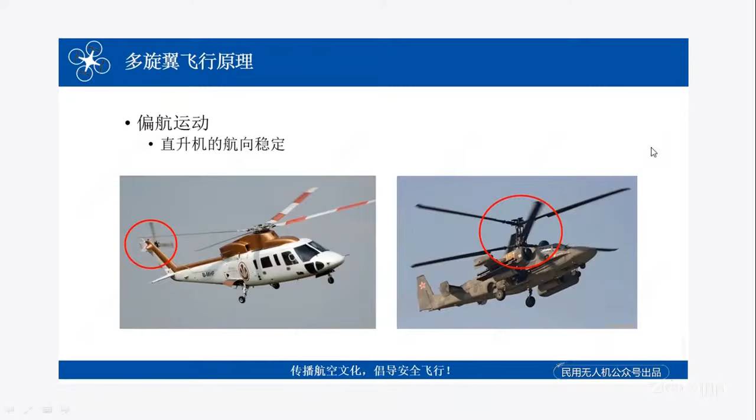So let's now talk about the debugging and assembly. I will leave you now with this video to learn how to assemble and debug the first part of the drone. Hopefully you can listen to the voice or just try to see what you can watch on the screen.

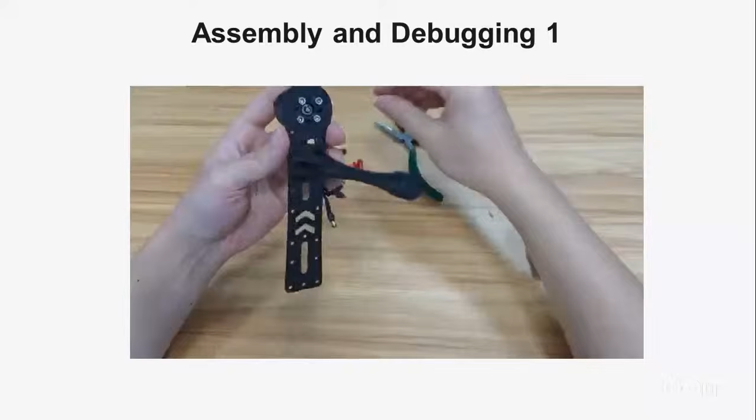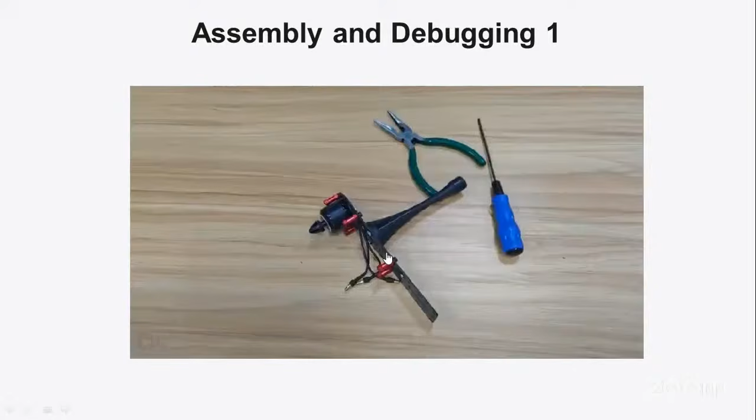Okay, this is the first step of the assembly: the motor installation. We are trying now to secure the motor to the carbon fiber lower arm using a screw. If you want to try again, it only takes a few seconds. So the first part is the motor installation.

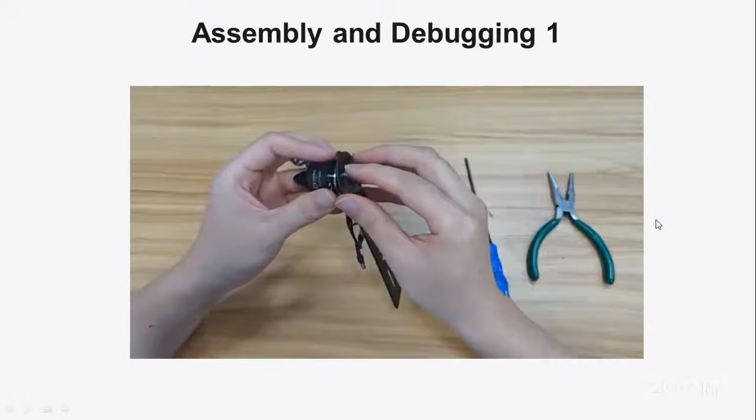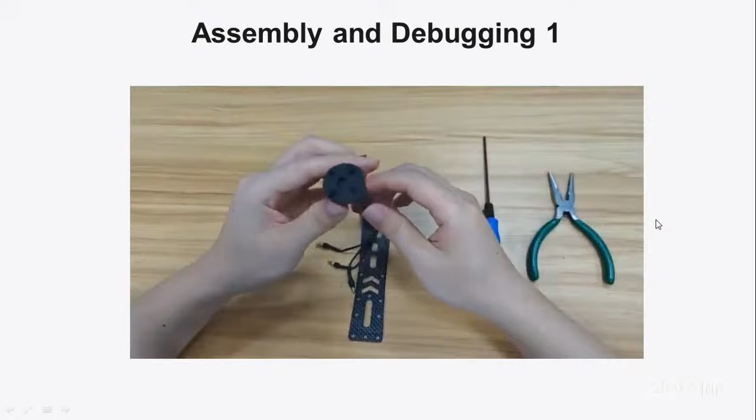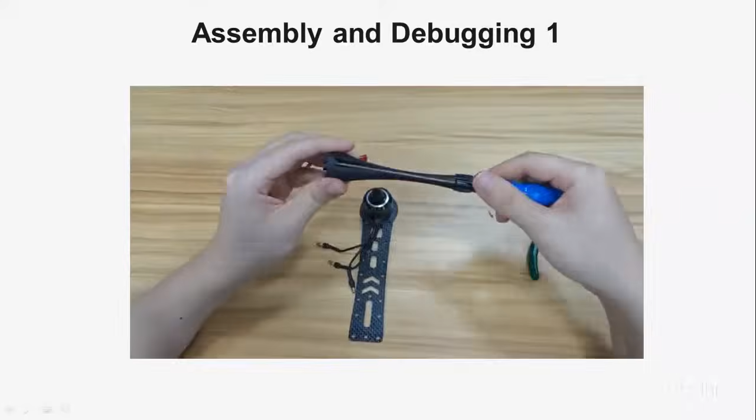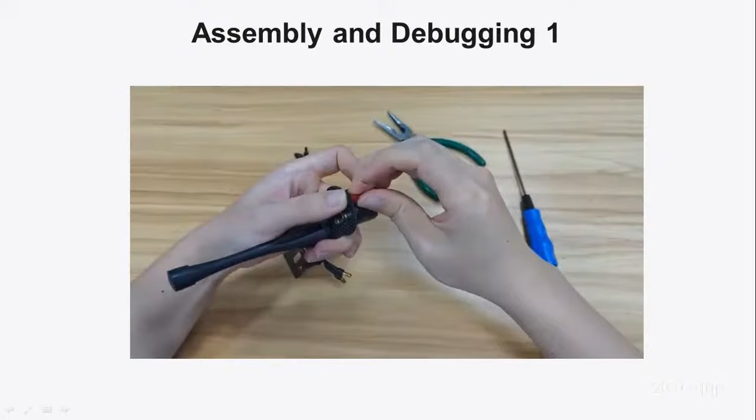And landing gear attachment, and the post assembly, the aluminum part. Of course, this is a laboratory module, so it can also teach students how to do the assembly and the debugging process.

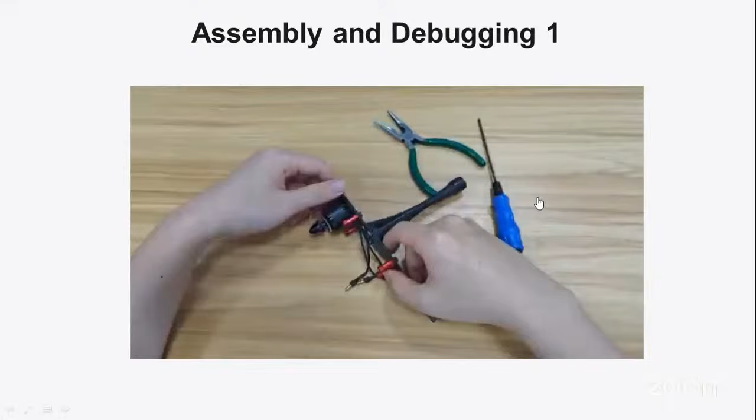Okay, so let's now move to the central power assembly, and there is also a short video showing the central power assembly process.

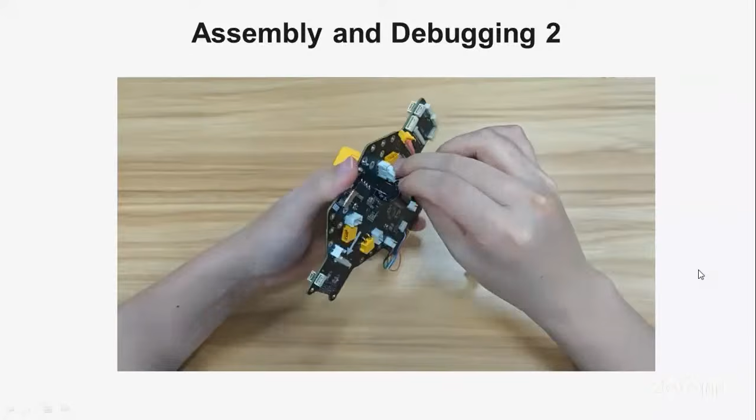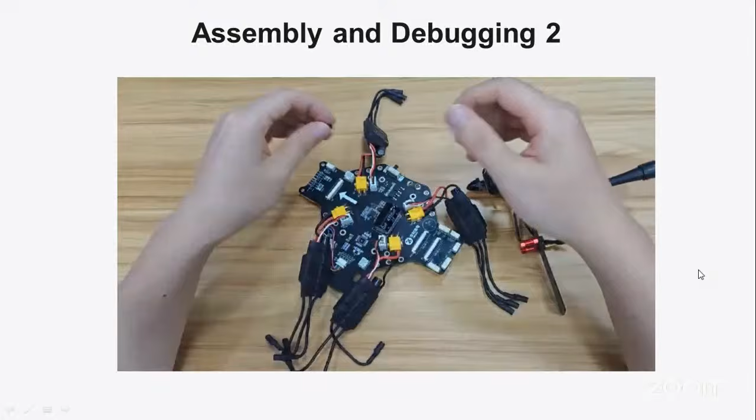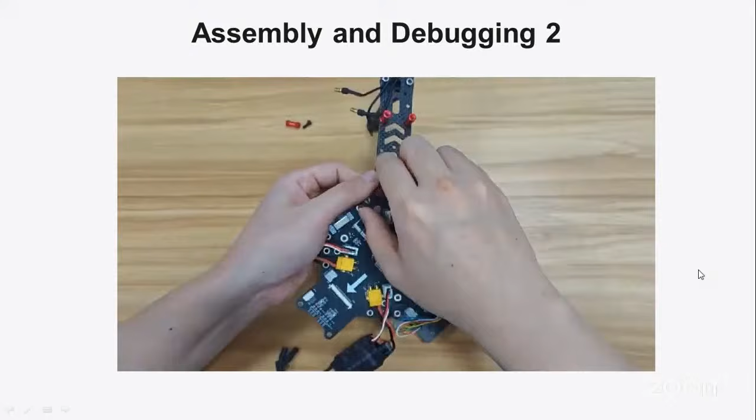For more knowledge, we have the electronic speed controller installation, we call it ESC, acting as the bridge between the circuit board and the motor. As you know, drones usually need AC to control speed, but we depend on the battery, which is DC. So we have a controller to modify or adjust the battery's DC power until it has the AC frequency needed to control the motor speed, based on the flight controller signals.

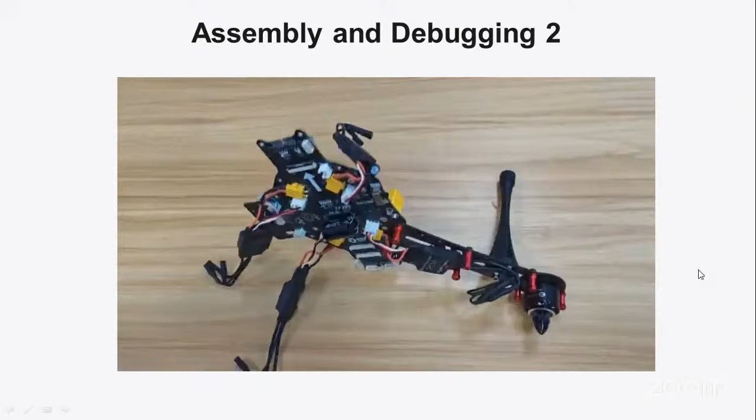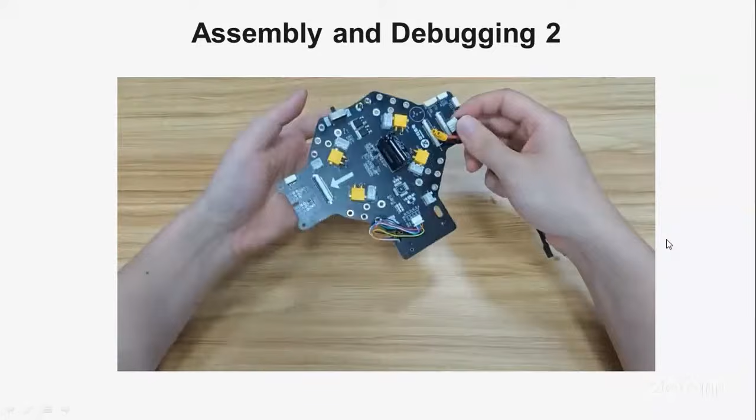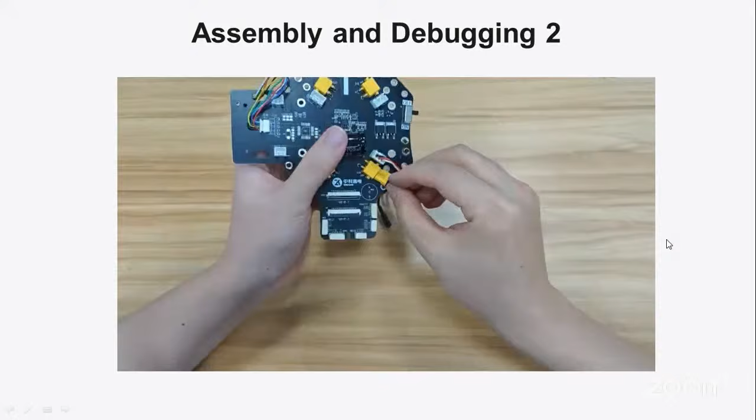I will also let you watch this video, it's only a few seconds. So first, after the motor installation and landing gear attachment, we are now installing the electronic speed controller and the frame assembly to secure the circuit board to the bottom, and also place the carbon fiber arm plates. This is assembly number 2.

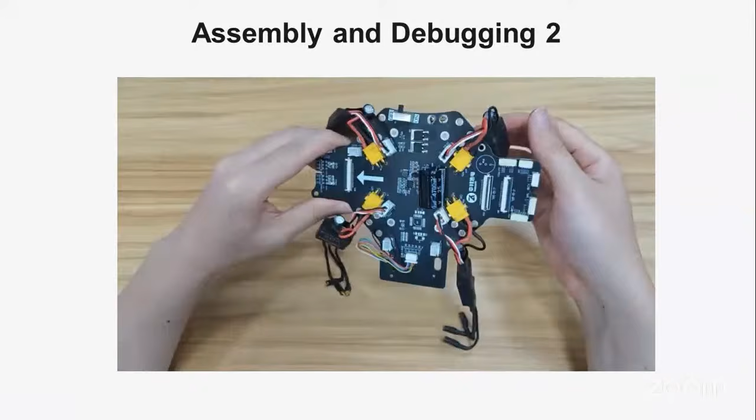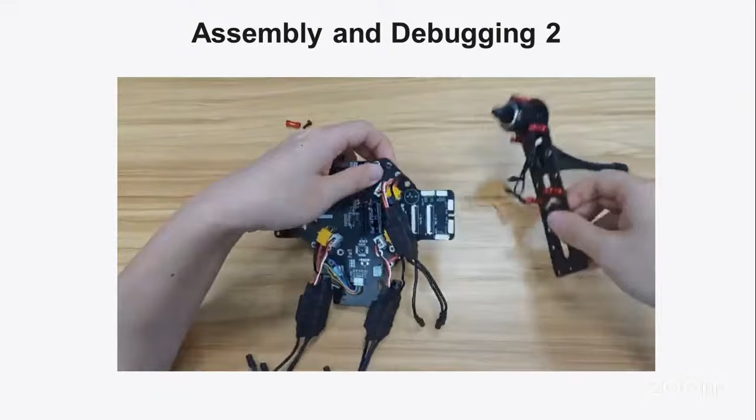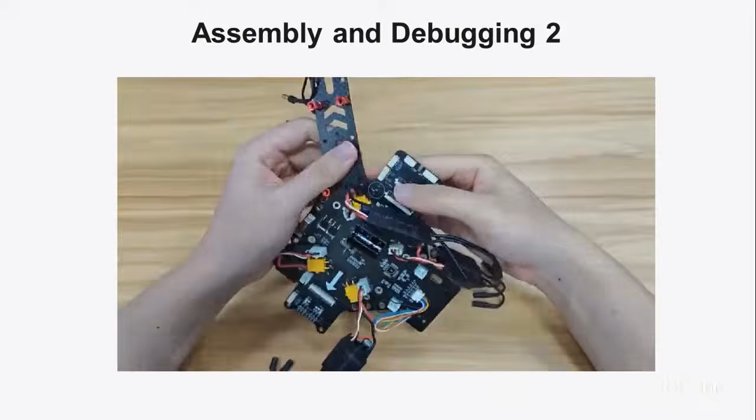As I mentioned, this is only a laboratory scale drone for the students, and also securing the wires here using a strap to firmly fix the controller into the lower arm.

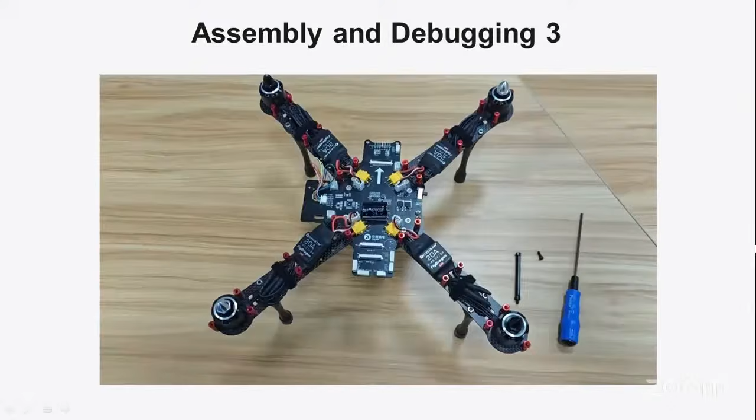Here is also another video showing how to install the battery section. So we have now fixed the four arms and are going now to install the battery part.

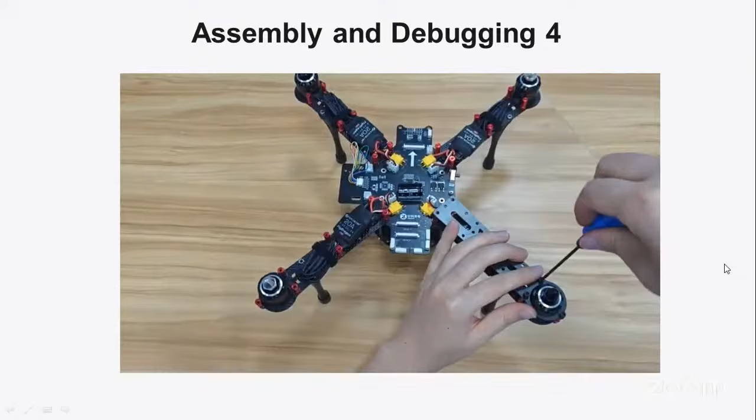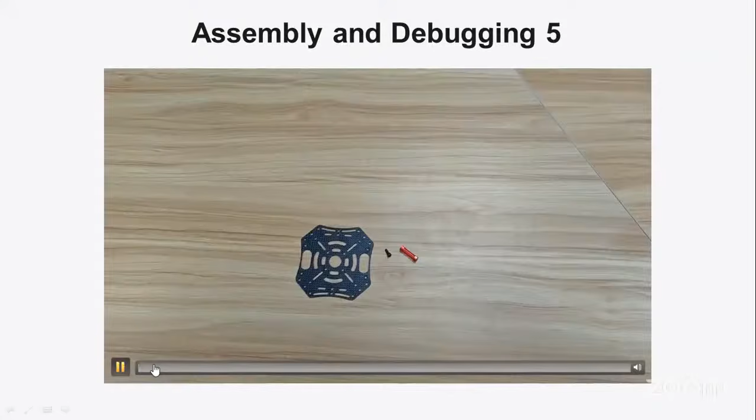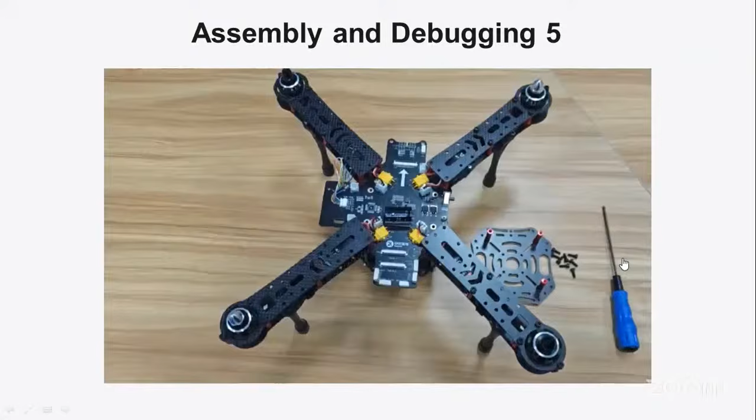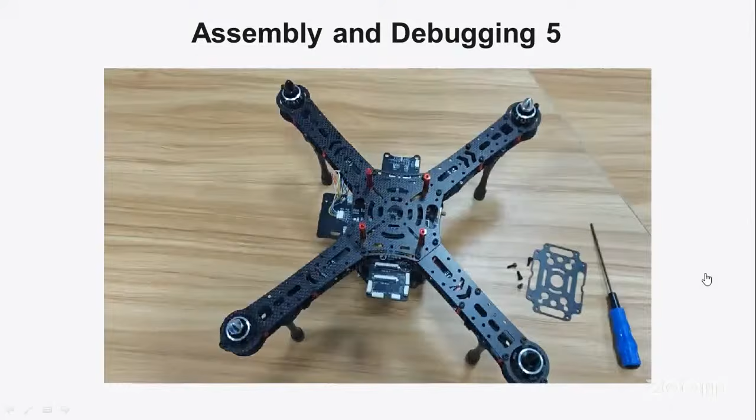Okay, after that, the number 5, the assembly and debugging step number 5. Next step. Actually, we have prepared a short video so as not to consume more time.

Okay, so now let's go directly to the practical testing of the drones, how it can be done. So also watching this short video, the drone flight training.

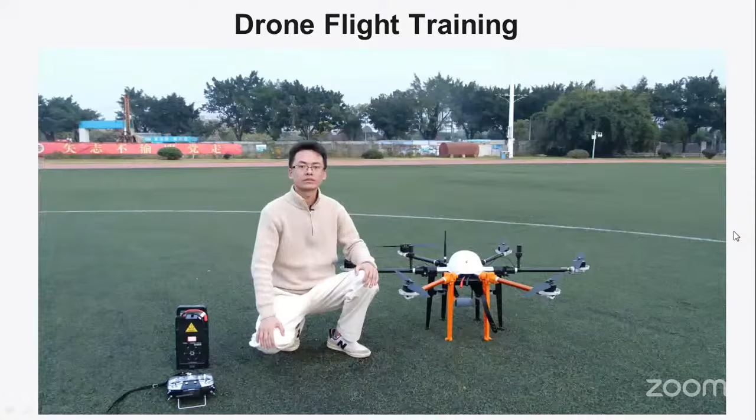We have to ensure the motor rotates smoothly without any obstacles. We have to make sure that the frame is stable. So two parts, it is important to make sure everything is okay before the takeoff: the mechanical inspection first, and the electronic inspection. Again, this video shows how we can make sure before the takeoff of the drone.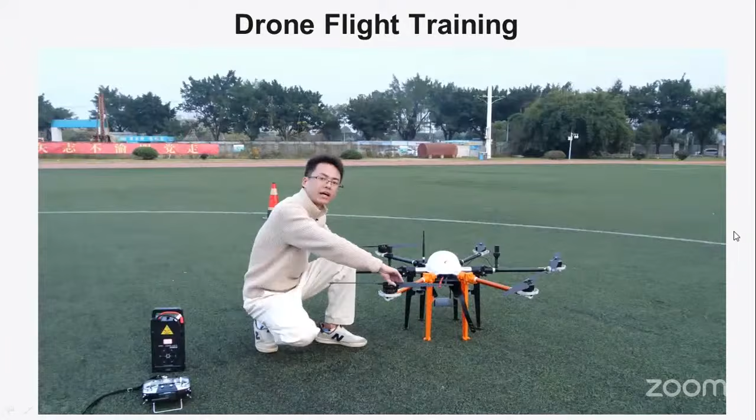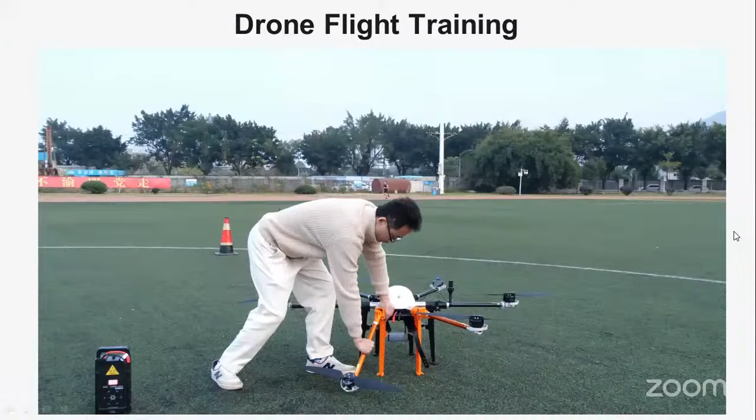Before takeoff, we have to check that everything is finished and record the results, and also sign everything on the checklist, which is an important step before the takeoff. This is the second step before the takeoff.

After powering the system, we first check the electronic speed controller, as I mentioned before, and this is actually a field drone, also used for training the students. We check the electronic speed controller display. The remote controller also we have to check. We have to check that everything is in a normal state.

We need also to make sure the camera and the electronic device integrated with the drone are working properly, and there is no abnormal heating. Also, we have to check the heat before the takeoff. We have also to check if all the indicator lights are correctly operating.

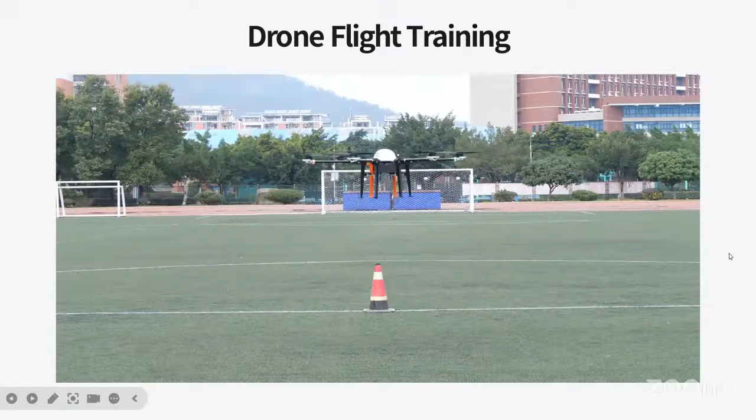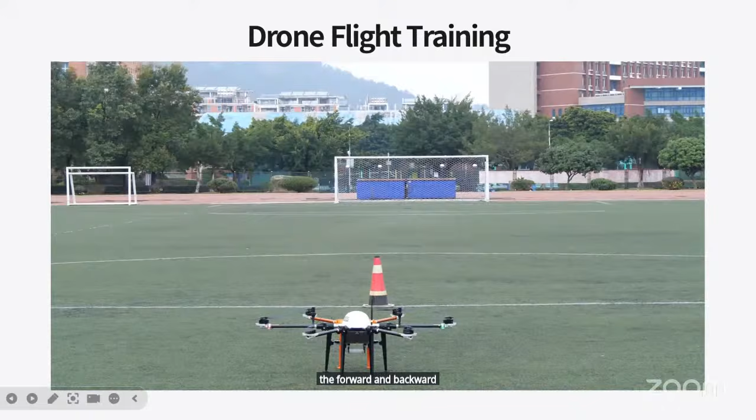This is the up and down and hover process. Next, we will check the forward and backward, left and right, and try to make the yaw movements. Check the flight altitude, the control response, the flight modes, to make sure everything is ready for takeoff.

Hello? Doctor, can you still hear me? Yes, we can hear you.

Okay, this is another step for training and to make sure the operation is correct before takeoff. Now you can see forward and backward, left and right, and also the yaw movement.

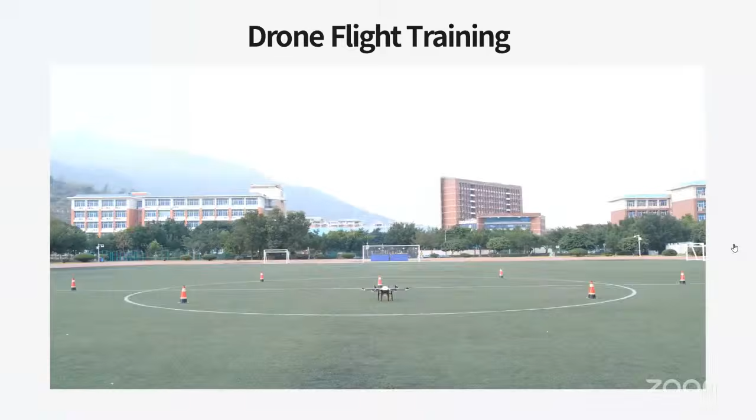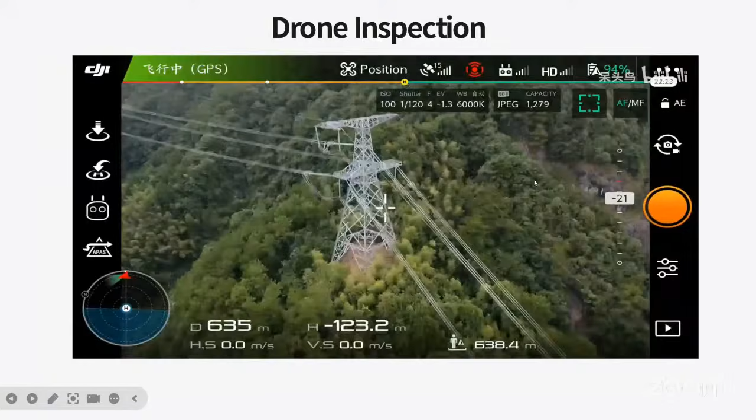Okay, let's check for that. Now we will continue with the detailed applications for the drones, which I think will be more interesting for many people, especially for electrical engineering.

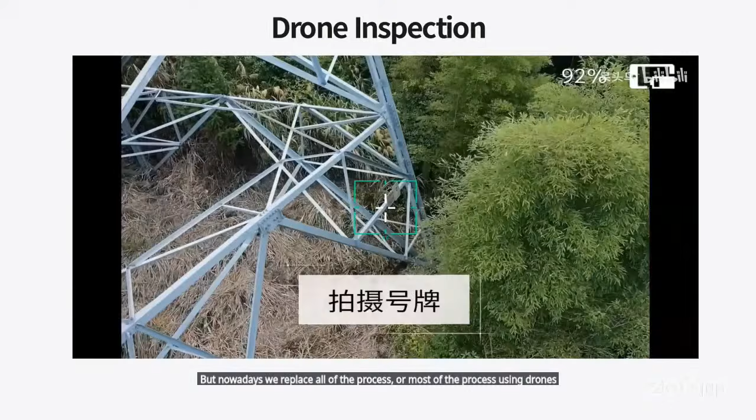The first application we will discuss is drone inspection, how we can utilize drones for inspection, especially for electrical engineering applications. Many years ago, we depended on manual climbing, and all of these applications were manual, which had the disadvantages of being slow, costly, and dangerous. But nowadays we've replaced most of the process using drones, which carry high definition cameras, infrared beams, and light detection and ranging technologies.

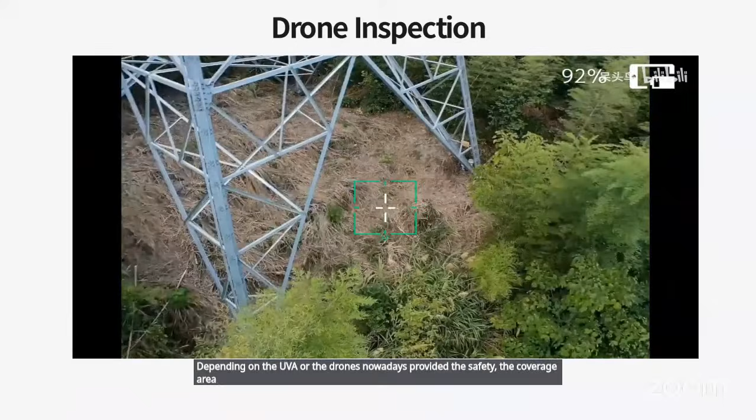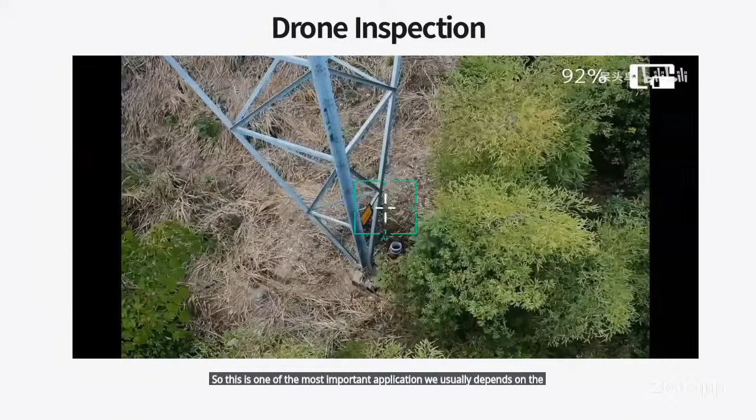Depending on the UAVs or drones nowadays, we get provided safety, expanded coverage area, and also predictive power. This is one of the most important applications we usually depend on drones for. It is now more safe to keep the technician on the ground, away from especially high voltage risk. Drones can also access remote mountain areas, which is very difficult to climb using human efforts.

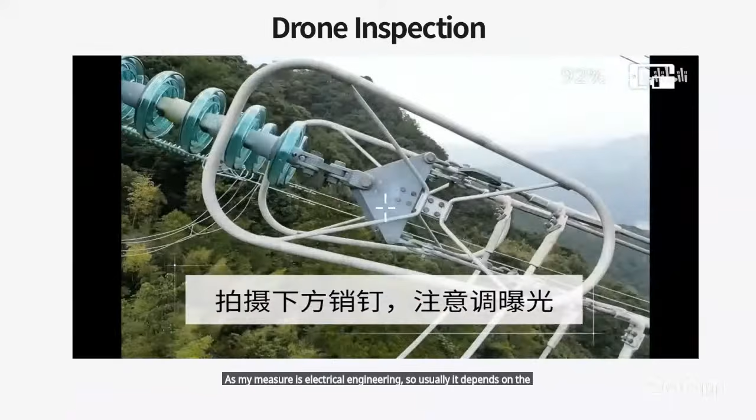Depending on the drones, we can prevent failures because these usually happen. Now we can ensure the reliable power system and make the diagnosis using UAVs or drones. As my major is electrical engineering, we usually depend on drones for the inspection of high voltage towers, insulators, and cables.

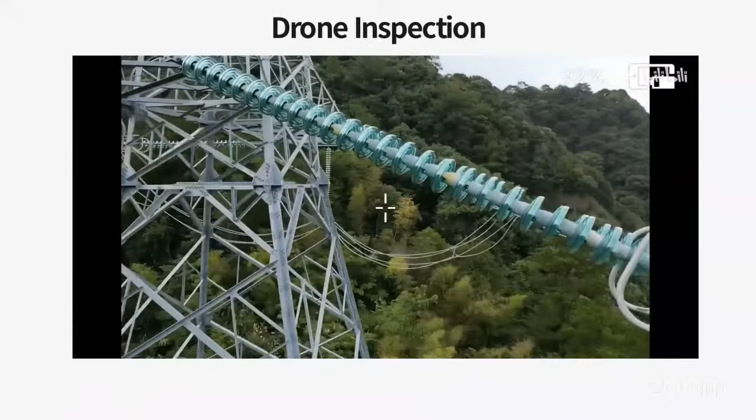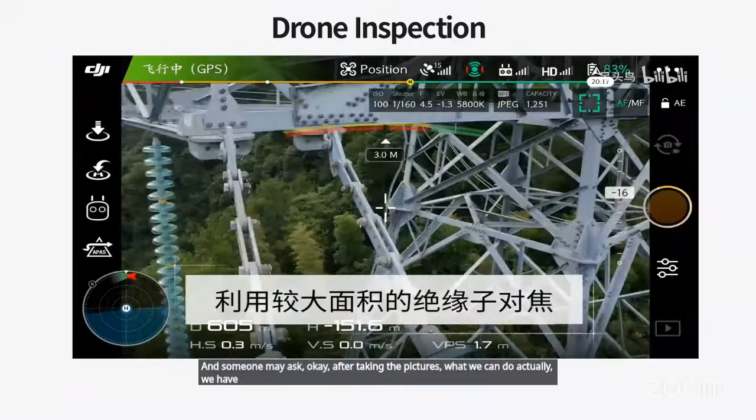Someone may ask, okay, after taking the pictures, what can we do? We have high definition cameras, infrared, and LIDAR, the light detection and ranging technology, which can, after taking the picture, let us analyze and know exactly what the problem is in the towers, power line, and insulators.

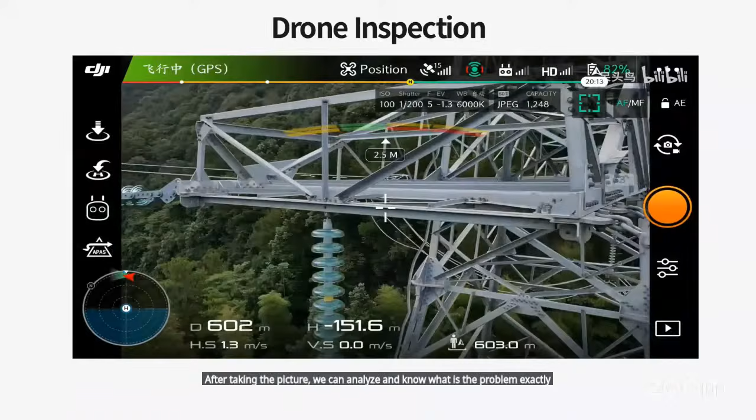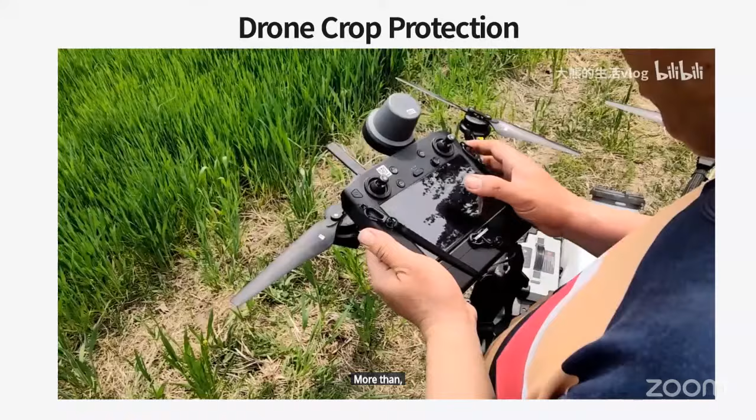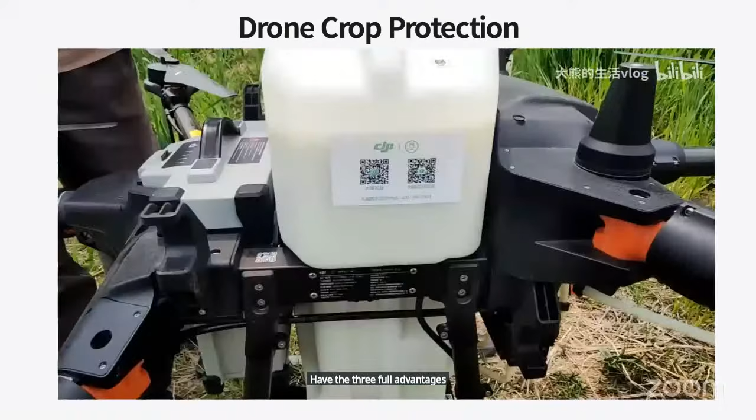This will also serve the future of sustainable farming. Look at how drones act for agricultural irrigation. And of course, saving cost and low environmental impact, because previously we depended on agriculture machines which usually consume fuel.

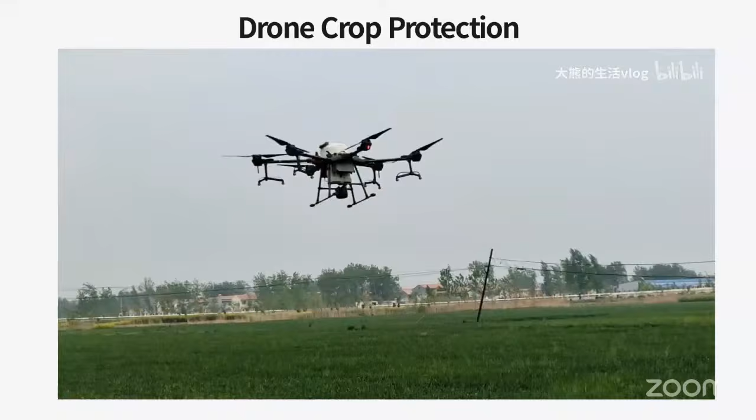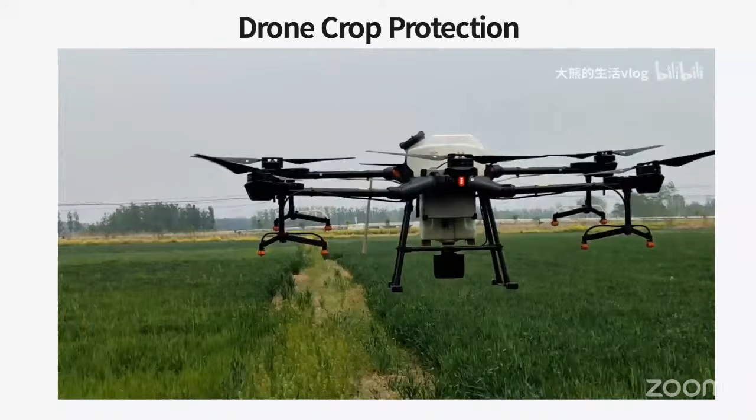After finishing the water, it can be replaced again, and everything should be controlled - the weight, the speed, the area of irrigation, everything must be controlled in advance, including the battery.

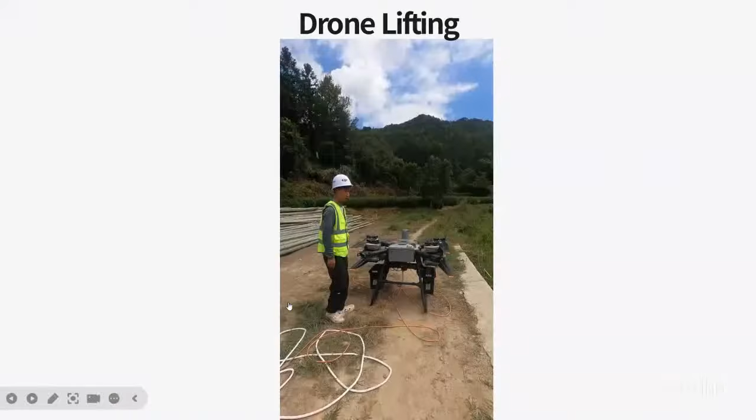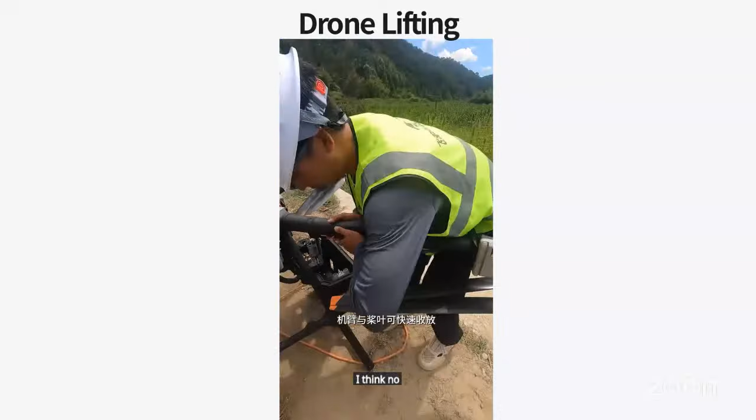Another application of interest is the heavy lift drone. I'm sorry this is in Chinese, but I can translate what the application is exactly. Now we depend on drones to lift and deliver loads of more than 200 kilograms. I think no need for the sound - it's very difficult to understand the Chinese.

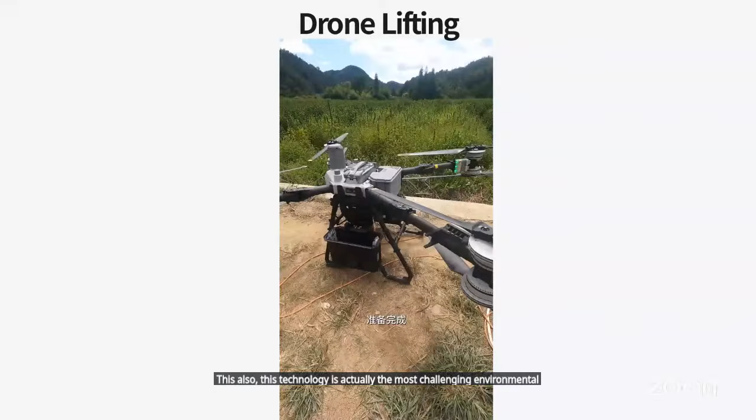Looking at the third application, which is heavy lift drones. This technology is actually the most challenging environmentally, because we depend on drones for lifting weight, and everything must be calculated to avoid any risk. The core advantages of this application are accessibility, safety, and finally cost and sustainability. Compared to helicopters, drones are also cheaper to operate and have a smaller emission.

I mean, a smaller carbon footprint, and they also require no landing strips. Of course, this will be helpful for emergency situations. You can employ it for different applications, especially now, as you can see, everything is controlled and deliverable from one place to another, which can also be helpful for complex situations.

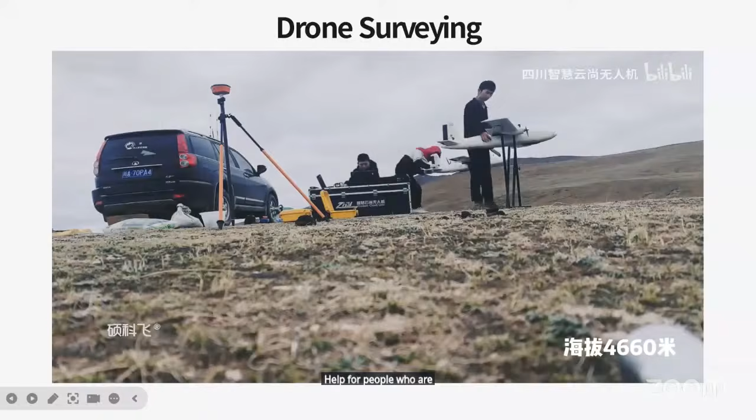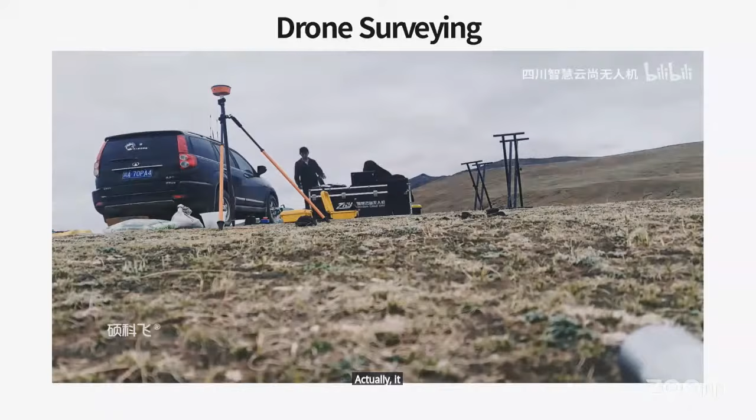Another application is drones used for surveying and mapping. This is helpful for people working in engineering in general, to replace traditional and intensive ground surveys, and also provide high precision drones integrated with other technologies like lidar, and with multi-sensors. So drones for mapping are integrated with other technologies.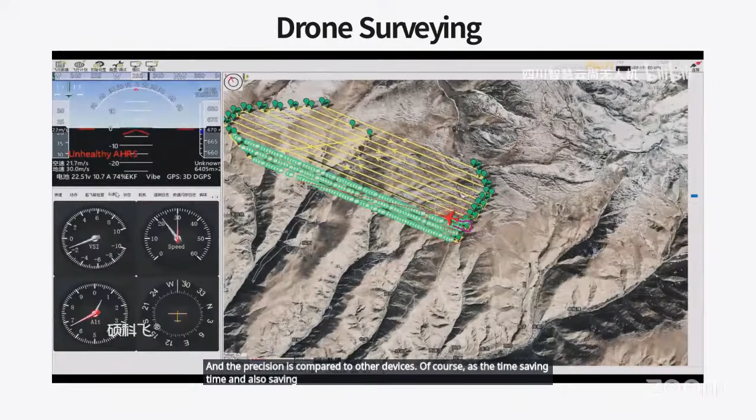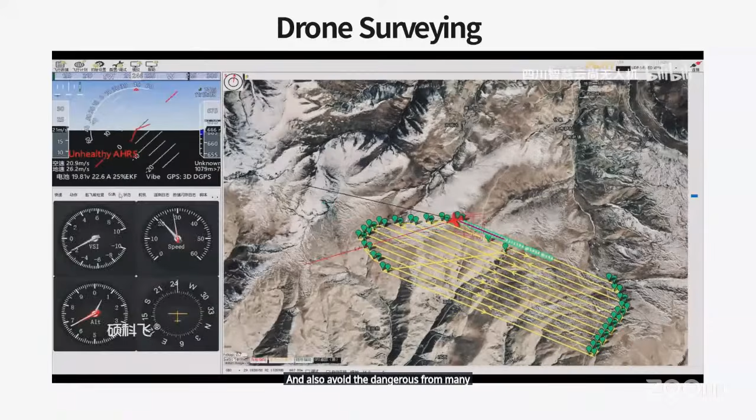The main advantage here is the high efficiency and precision compared to other devices. Of course there's saving time, saving cost, and total safety, as we eliminate the need for teamwork and avoid the dangers from many processes. This technology now provides faster, safer, and more accurate results than manual methods, with different kinds of drones providing these capabilities.

Now we are going to talk about coordinated development in regional development. So we are now focusing on Fujian. As I mentioned before, Fujian province is one of the biggest provinces in China.

To achieve balanced, high quality development across Fujian, they usually use two geographic pillars: one is mountain-sea synergy, and the other is urban-rural integration. Fujian connects coastal industrial hubs with resource-rich inland mountain regions. This facilitates industrial transfer and closes development gaps, also connecting urban and rural areas by synchronizing spatial planning and infrastructure, bridging the service divide in education and healthcare.

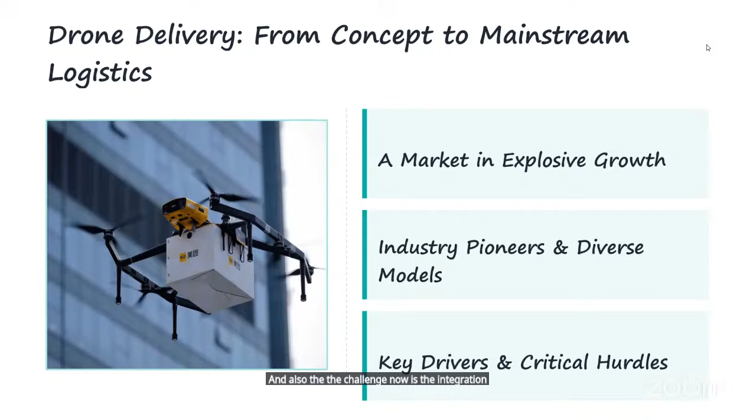For the conclusion and appendix, actually the future of drones is not just about the hardware. We already have advanced platforms for hardware. It is about building a safe, reliable, intelligent, and fully integrated ecosystem, as I mentioned a few minutes ago - it is not only drones, it is integration with other technologies. Driven by AI, artificial intelligence, and transformative applications like UAM, Urban Air Mobility, and drone delivery, this system will redefine the economy and daily life. To conclude, the sky is no longer just a limit, it is our new frontier.

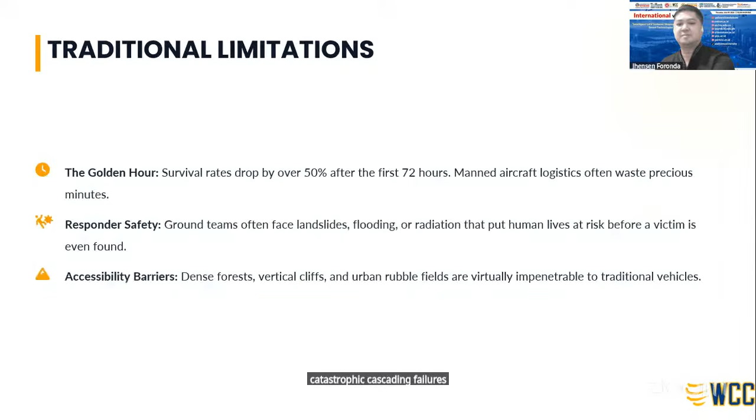So what are the limitations of traditional methods? First, there's the golden hour obstacle. Survival rates drop by over 50% after the first 72 hours waiting for manned aircraft logistics. So we waste precious time, in minutes or seconds, in surviving critical events.

Second, responder safety is heavily compromised by landslides, flooding, or hazardous environments. And finally, physical accessibility barriers like dense forest or urban rubble are virtually impenetrable by standard emergency vehicles.

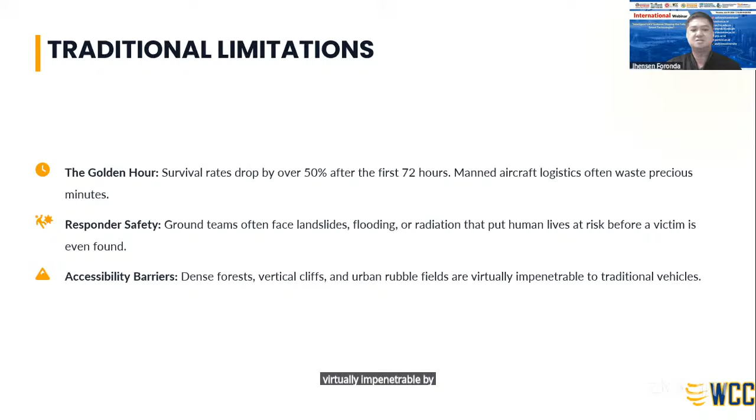So let's talk about what makes UAVs intelligent. It is the fusion of artificial intelligence and edge computing that makes UAVs intelligent. Modern UAVs don't just record footage to an SD card for later review. They possess onboard processing that allows them to see and react in real time. This includes immediate object detection to identify human forms or grid damage, alongside autonomous path planning to navigate complex ruins without relying constantly on a human pilot.

Next, deployment speed, and every second counts. In an emergency situation, time is measured in lives. Traditional helicopters require extensive pre-flight checks and massive logistical coordination.

In contrast, enterprise UAVs can be airborne in less than 15 seconds. Trials show that drone-assisted teams locate victims an average of 3 minutes faster in immediate search zones. Every minute determines life or death.

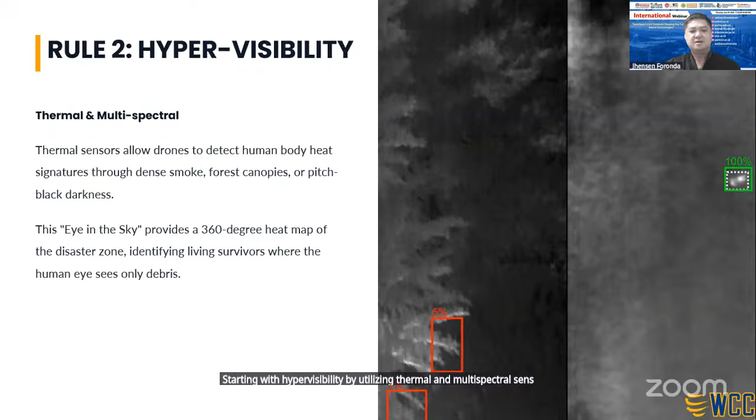What is hypervisibility? This brings us to our core operating capabilities, starting with hypervisibility. By utilizing thermal and multispectral sensors, these intelligent drones can detect human body heat signatures through dense smoke or thick forest, identifying a human body even in pitch black darkness. This eye in the sky provides a 360 thermal map of the disaster zone, finding living survivors where human eyes see nothing but debris.

Rule number 3, autonomous search. We use advanced AI algorithms to analyze high-resolution feeds and instantly tag objects of interest, such as bright colored jackets or localized heat blooms. This allows operators to focus purely on rescue strategy rather than straining to scan an entire square kilometer, doing so in under 10 minutes.

Let's talk about multi-UAV swarms. What if the area is too massive for a single drone? That's where multi-UAV swarms come into play. Multiple drones can work together autonomously to map massive areas in parallel. They possess built-in redundancy, so if one unit fails or drops out, the remaining swarm automatically redistributes the search area, ensuring 100% saturation and recovery of victims, even covering incredibly hostile terrain in dark, pitch black environments.

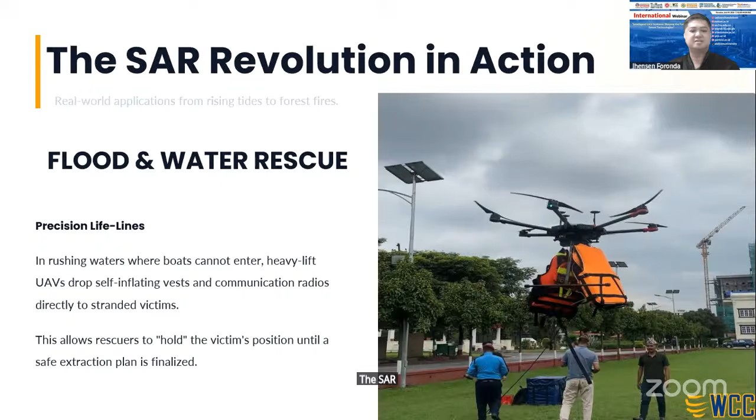For the next slide, we have the SAR revolution in action. Let's look at real world applications, especially in the search and rescue revolution, in raging floodwaters where rescue boats cannot safely venture.

For example, heavy lift UAVs serve as precision lifelines. They can fly directly onto stranded victims and drop self-inflating vests, and can also bring communication radios, effectively holding and securing victim positions until the full extraction team can execute a safe plan.

During wildfire events, visibility is practically zero. UAVs give fire commanders a vital strategic edge by providing real-time tracking of hotspots right through thick smoke that completely blinds traditional helicopters. Long endurance drones can monitor the fire perimeter 24/7, so command centers can issue preemptive, accurate evacuation orders well ahead of time. That's the power of UAVs nowadays.

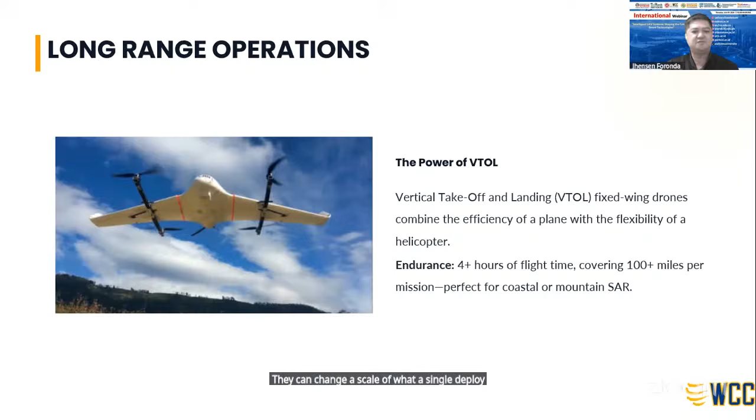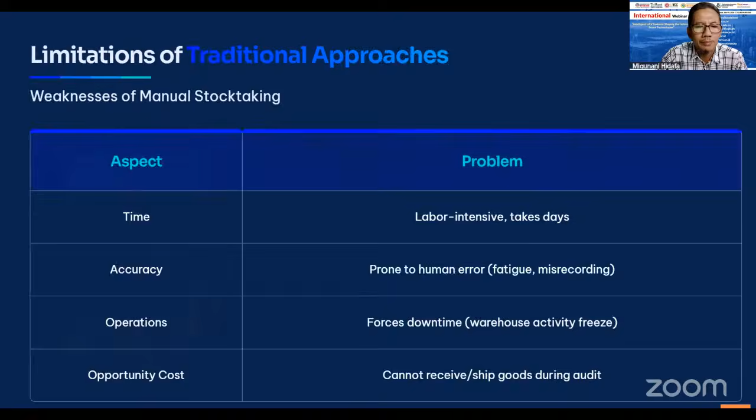This challenge becomes even more complex with the evolution of modern warehouse architecture designed to maximize space utilization. Logistic facilities now use high-bay racking systems. Scanning barcodes on these towering racks forces staff to use heavy equipment like scissor lifts. This not only slows down the process but introduces significant OHS risks: falling from heights, equipment accidents in narrow aisles. This is the gap that UAV technology aims to fill.

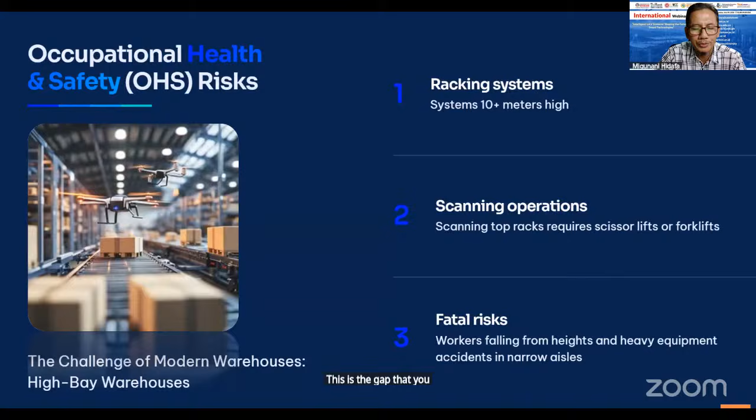To break through this impasse, indoor UAVs emerged as a revolutionary solution. Indoor drones act as more than just flying vehicles; they function as dynamic Internet of Things nodes moving through three-dimensional space. With the ability to maneuver in narrow aisles and reach the highest racks quickly, UAVs transform the stock-taking paradigm from a reactive agenda that halts operations into a proactive, continuous, and most importantly, safe data monitoring stream in the inventory.

The development of indoor UAV technology did not happen through a single invention, but through a series of complementary technical resolutions. Let's look at three major milestones.

First, Choi and Lee solved the navigation problem in GPS-denied environments using the SLAM algorithm. Second, Betty and colleagues built a communication bridge to integrate UAV data into the WMS. Third, Wang and Hu optimized computing with edge computing. Together they form a complete foundation.

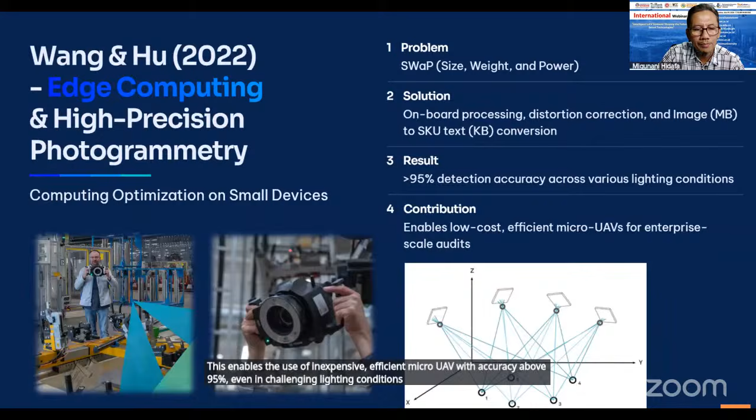Now we reach the core of the framework. The synthesis of the three research studies yields a four-phase architecture that is sequential and interdependent. Starting with Phase 1, spatial mobility, where the drone moves and maps the environment. Phase 2, edge computing for data extraction. Phase 3, IoT middleware for data transmission. And Phase 4, WMS reconciliation that produces the managerial dashboard. Let's examine each part in detail.

Phase 1 is the physical foundation. Here, the drone lifts off from its docking station and takes flight. Using a LiDAR sensor and depth camera, the drone runs the SLAM algorithm to simultaneously build 3D maps of the environment and calculate its own position. The obstacle avoidance system ensures the drone safely navigates around moving forklifts and static pillars. The output of this phase is precise coordinates and an accurate warehouse map. Without this, the subsequent phases are impossible.

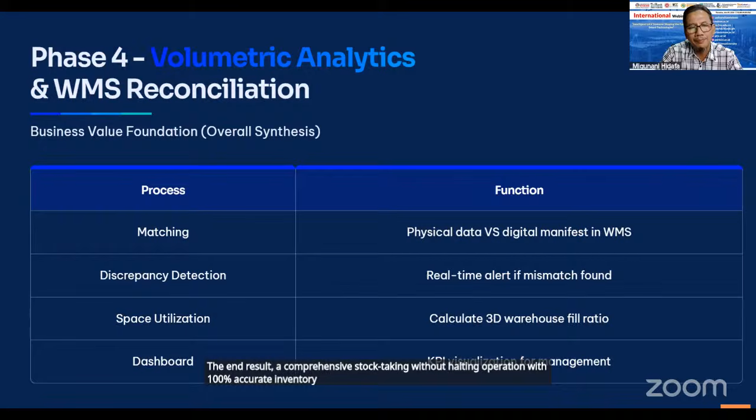This framework is not just conceptual. Field implementation proves three major achievements. First, drones can maneuver in aisles with less than 2 meters between racks without collision, drastically eliminating OHS risks. Second, the photogrammetry system achieves barcode detection accuracy above 95%, even in challenging lighting conditions. Third, and most financially impactful, stock-taking time shrinks from days to hours, dramatically reducing audit costs and downtime.

One of the key strengths of the framework is scalability for SME warehouses. A single micro UAV with an ESP32 cam operating after hours is sufficient. For a regional distribution center, 3 to 5 drones with industrial-grade hardware and a managed network are needed. And for a mega fulfillment center like those of global e-commerce companies, we're talking about a dozen drones with swarm intelligence, private 5G network, and predictive AI operating 24/7. The framework grows with your business needs.